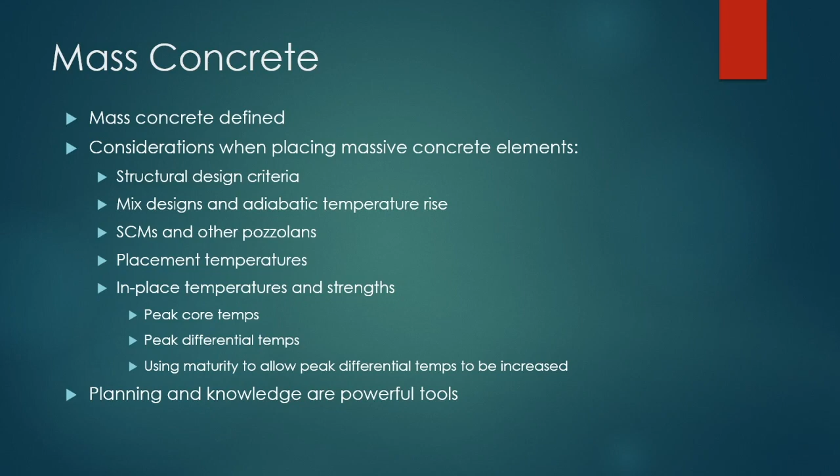So within ACI 207, which is the mass concrete spec, there is a very short, succinct definition, which is: mass concrete is defined as any volume of concrete with dimensions large enough to require that measures be taken to cope with the generation of heat from hydration of the cement and the attendant volume change to minimize cracking. So it really is all about trying to make sure that the massive concrete that you place doesn't crack. That's the goal.

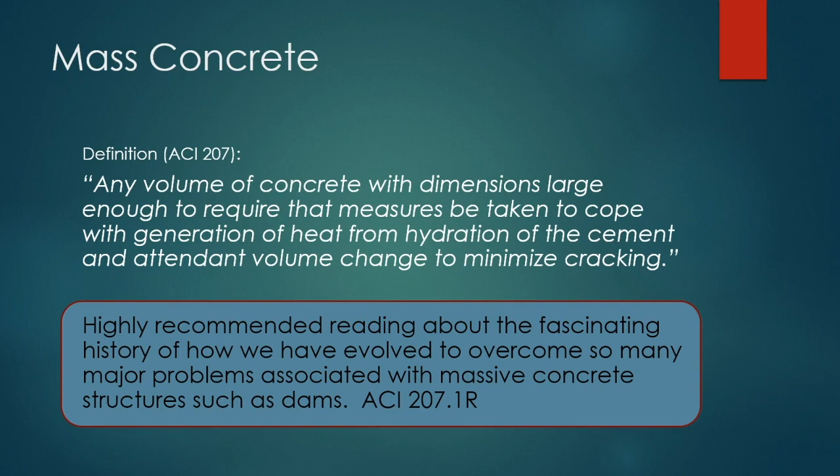I would highly recommend, if anybody is interested in it, to pick up ACI 207.1R, which is the latest version of the mass concrete spec. And it's the intro spec. There are several others, but there's a great section on the history of mass concreting. It was fascinating to read, had no idea, and it's really pretty interesting stuff. So not going to get into it here, but definitely read it if you're into history.

So as far as structural design and the engineering of mass concrete, mass concrete is used when you need certain durability and obviously structural integrity for a bridge, a dam, anything like that. There are definite structural design criteria that have to be met. For example, durability. This mass concrete can't just fall apart in 20 years. You want it to be durable. You want to make sure that when you're building, you do this with economy in mind. Certain aspects of mix designs, for example, or even the economy of placement, the economy of the construction process itself has to be considered.

You have to consider the thermal action of the mix design that you are creating, because you can have a mix design that sounds great in theory, but that might not function well in practice. And ironically, in mass concrete, you would think that strength would be a big deal, and it's not. It's almost always very much a secondary concern. Part of the reason for that is that the strength of the mass concrete is rarely an issue, because it's mostly the mass that is doing the structural function, not necessarily the strength.

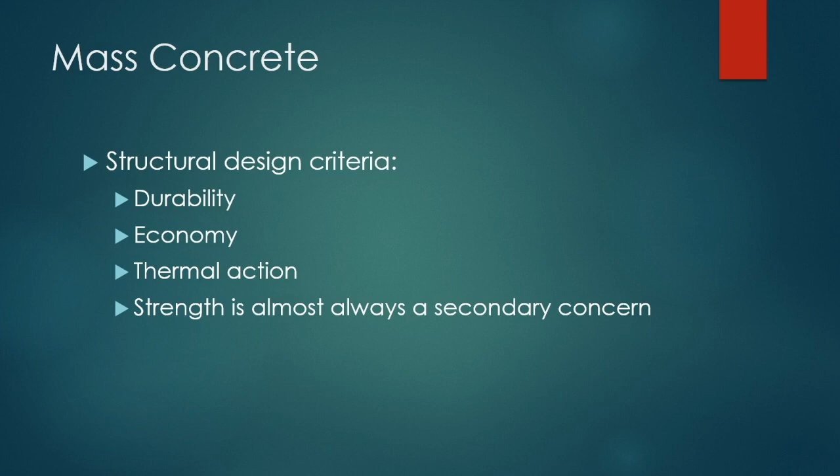So there is so much in ACI 207 that talks about mix design considerations that it would just be a disservice to 207 to talk about it here in a quick little webinar. But they do point out that thermal action and adiabatic behaviors are a very important consideration when you are creating a mix design.

And what that means, if you do not know what adiabatic, or some people have referred to it as semi-adiabatic, these are behaviors where when you create a mix design, that mix is going to behave in a certain way where when you mix the concrete at one temperature, no matter what, that concrete mix is going to rise a fixed amount. It's the adiabatic rise. That is a property of a mix design.

So if you have a mix design that has, let's say, 300 pounds of Portland cement, and you place it in a mass, you know how many degrees that mass is going to rise at its core. That is the adiabatic behavior that you're looking for. We'll talk a little bit about how you can evaluate it a little bit later on.

And then there's workability. You have to be able to have a mix design that's also workable. It has to be pumpable, or maybe not. Maybe you're going to use buckets. How is the concrete going to be placed? There are a lot of other variables addressed in 207, such as the control of the water-cement ratio, the placement temperature, the size of the aggregate, the cleanliness of the aggregate, if you can believe that. Anything that goes into quality concrete is magnified when it comes to mass concrete.

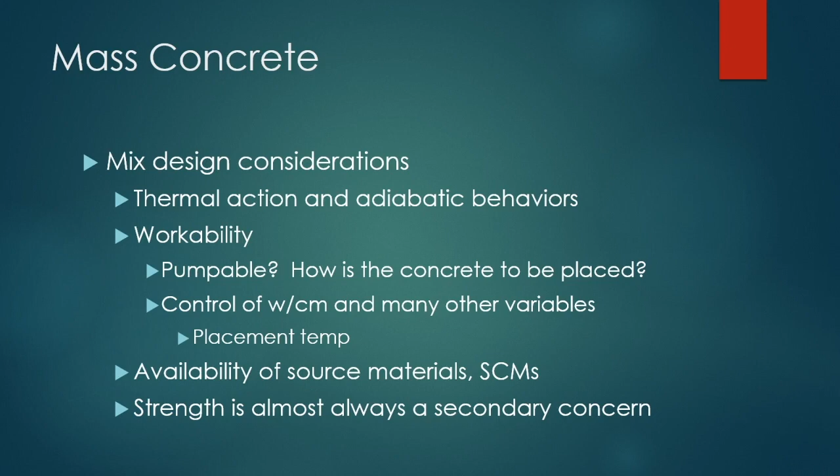And then, as I said earlier, strength is almost always a secondary concern. Pretty much any mix design is going to get to the strength that is needed for that project. So some of the other considerations are, obviously, you need a low heat of hydration cement, for example, like a Type 2. It's pretty rare that people are using a standard Type 1 cement these days, unless you have a very high percentage of slag. And I'll talk about that in a minute.

One of the things that they stress in the 207 document is that mass concrete mix designs typically have very low cement factors to begin with. Some of them are ridiculously low. There was one that they cited in the document with 185 pounds of total cementitious materials per cubic yard, which was unheard of even as recently as 20 years ago. So there have been a lot of advances made in even the past 10 years in understanding the effects of these cementitious materials.

They do talk about in the document that air entrainment can really aid in workability, even in situations where freezing and thawing isn't a big concern. So if you are working with mass concrete and you have no other way to improve the workability of your mix, you can consider adding an air-entraining admixture. There are plenty of admixtures that they cite to reduce the water requirements while also improving workability, and also something called pot life, which is the ability of the concrete to stay fluid inside the mixer, and also delaying set times so that all of the concrete sets up together.

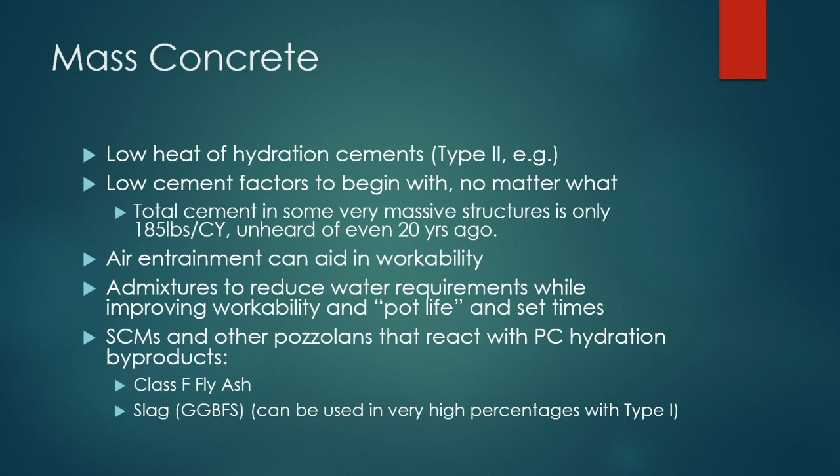One of the big aspects, and to be honest with you, it's a big aspect of not only mass concreting, but of course it's a big aspect for Con-Cure, because that's what we do. We make temperature monitoring equipment, but temperature control of any mass concrete element is very important.

There are multiple ways. They cite 4 different ways to control the temperature of your mass element. The first is with what they call pre-cooling. And pre-cooling simply means you're going to cool the aggregates. You're going to use potentially ice for your mix water. You might use liquid nitrogen to cool the mixed concrete, and you're going to ensure low placement temperatures.

So what that basically means is, instead of, in the dead of summer, placing your standard 90-degree concrete, you're going to intentionally make that concrete something like maybe 50 degrees or 60 degrees, just because you want that low temperature to start off with, because you've got that adiabatic rise to contend with.

And then the other thing that you can do, and I don't know how often it's done these days, I've actually never been on a project where they had to run pipes through the structure, but post cooling is where you'll run pipes through a structure and run either cold water or something else that removes the heat from the inside of the mass.

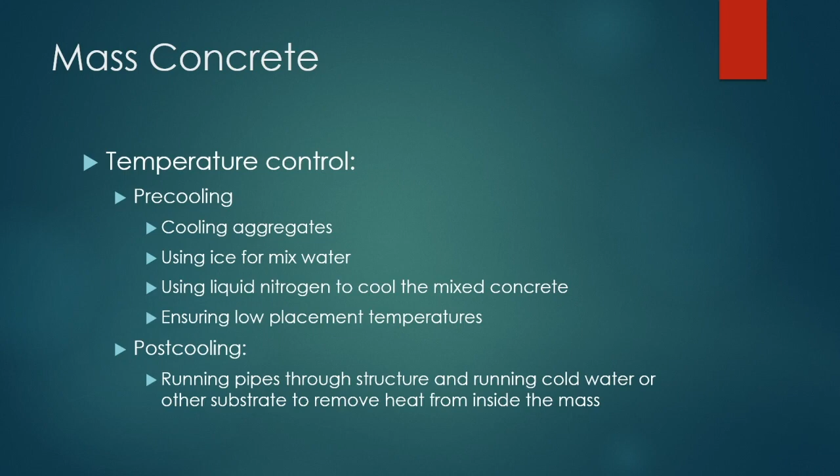That's one way of doing it. Apparently, with very massive structures, that's still common. I've not worked on one that ever needed that. And then we touched on this a few minutes ago, but using the mix designs to keep that heat

If you can't exceed, I'll just throw a number out there, 155 degrees, and your maximum temperature rise for that mix design is 65 degrees, then your maximum placement temperature is 90 degrees. Typically, you're going to want to place concrete at much lower temperatures than that.

And as long as you know that the maximum peak temperature value will not be exceeded during the initial weeks as it's curing, then all you really need to do is keep the differentials from getting too high, because that's another factor for mass concrete, the maximum differentials, which is the difference between the core, the center of that mass, and the outside edge of that mass. And the way you do that is by using insulation.

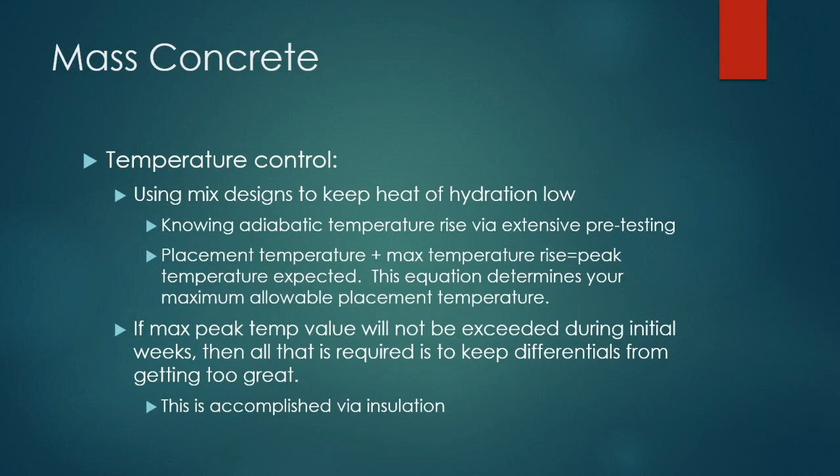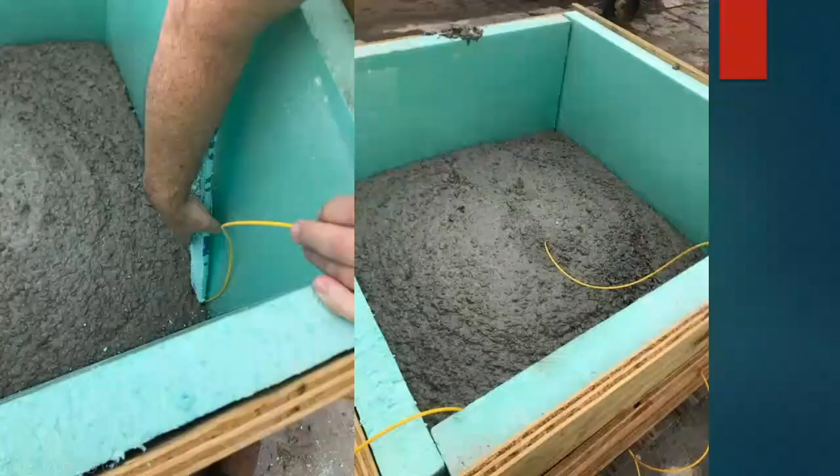If you see right here where my mouse is, there's one of our recording devices, and we've got all these sensors that are ready to go down inside this concrete. And in fact, here's a picture of us putting one of the sensors down along the corner or the edge, and then also one is smack dab in the middle,

and then they filled up the rest of the box just like that. And so we put a lid on it. There's a lid back there. We put the lid on it and we monitor that. And the purpose of this is to determine the maximum heat rise. That's that adiabatic heat rise.

Now this is definitely not adiabatic testing the way it would be done in a laboratory. It just gives us sort of a feel for the concrete that's being generated, the mix design. Because adiabatic testing is a very specific process.

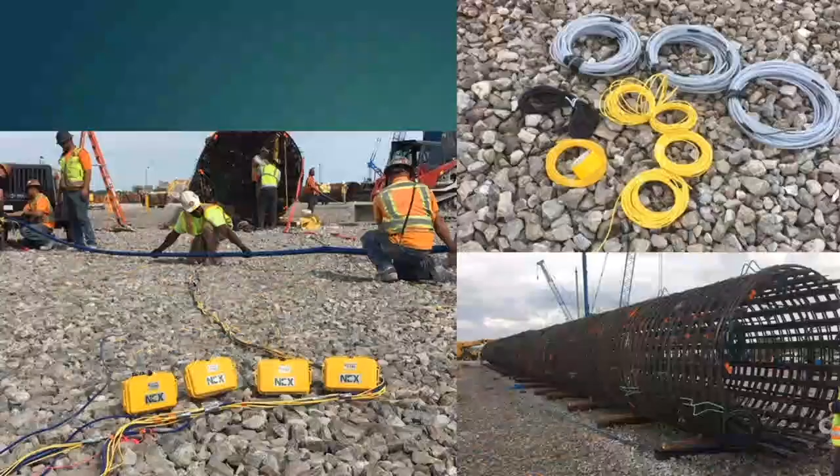And at that point, once we know that the mix design is capable of not blowing past our peak temperature, then we can use it in the field. And these are just some pictures of a large mass concrete job that we're currently on.

We have lots of sensors that are going down inside a very large drilled shaft. The sensors are all strapped up to this giant cage that is then lifted and placed, put inside the hole, and it is a huge project. I think these were 100 and something feet deep.

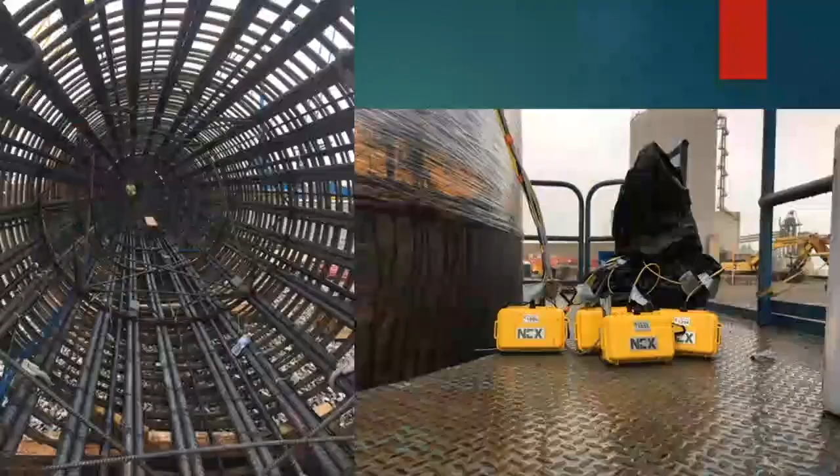We needed to monitor from about the midpoint on up, and so we had sensors that were placed all throughout this cage, and then the sensors actually came up and over this collar here. And if you can see where my mouse is, we've got our devices sitting there recording all of this.

And so when you record all of this temperature, and it may be a little difficult to see, but this is some of the summary data that we were able to collect from that particular test pour that we did, where we had the temperature at a depth of 50 feet, 50 feet of concrete. The centroid, the peak temperature was 142 degrees, well within the maximum temperature that they could experience. So they were well within that. The mix design was working beautifully.

The edge, which is right along the side where the earth is, was only 115 degrees. So the delta, the maximum delta between the centroid and the edge was about 29 degrees, a little bit below that Fahrenheit, which means that again, the mix design is doing exactly what it's supposed to do. You're not going to have too much thermal stresses.

We also were able to, because of maturity, evaluate the strength of this concrete as it's curing, and it took a certain number of hours to reach, for example, 3,500 psi, and then 5,000 psi. And those are important numbers because you don't want to have one area of the concrete that is much higher in strength than another area of the concrete, because that can also cause some stresses.

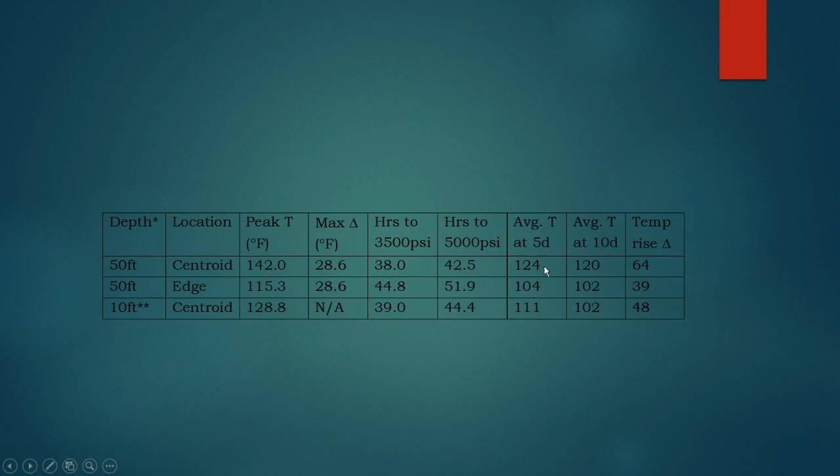And it was pretty interesting that the temperatures, we had a peak of 142 degrees, but then by day 5 it had dropped down to 124. And then by day 10 it had only dropped another 4 degrees. So this concrete was hydrating slowly, and it was doing exactly what it was supposed to be doing.

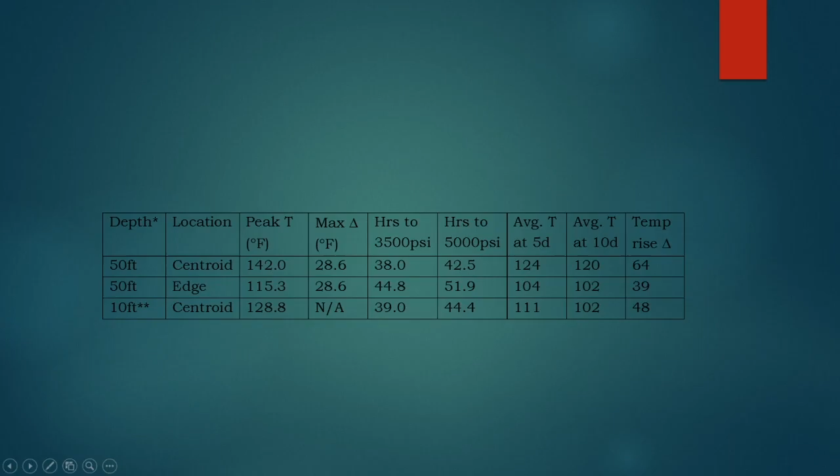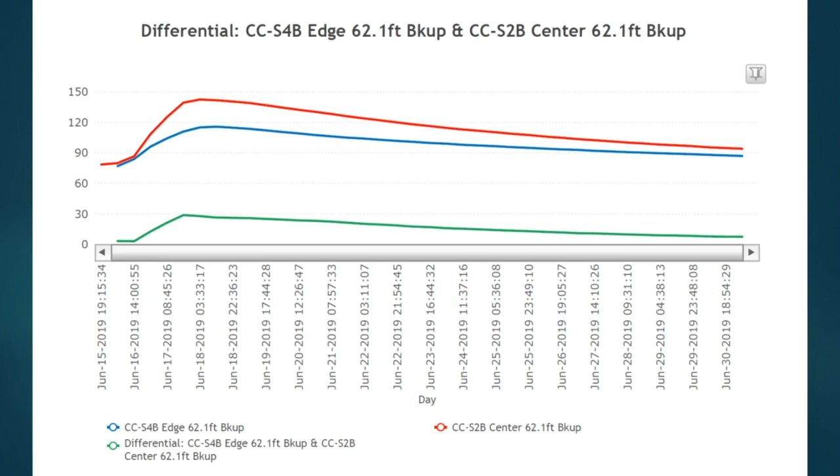So using temperature probes, we can monitor the central core and also the outside edge or the face temperatures, and it gives a clear indication of the status of the concrete at any given moment in time. One of the other things that you can do is use maturity to determine the in-place strength of the mass, which in some cases can allow the maximum differentials to be increased gradually because the concrete can withstand the tensile forces that are acting upon it.

And really, what that basically means is that you have the opportunity to use the maturity system to determine the maximum temperature allowance based on the strength of the concrete. Initially, you may have a limitation of no more than 35 degrees difference between the core and the outside edge of that concrete.

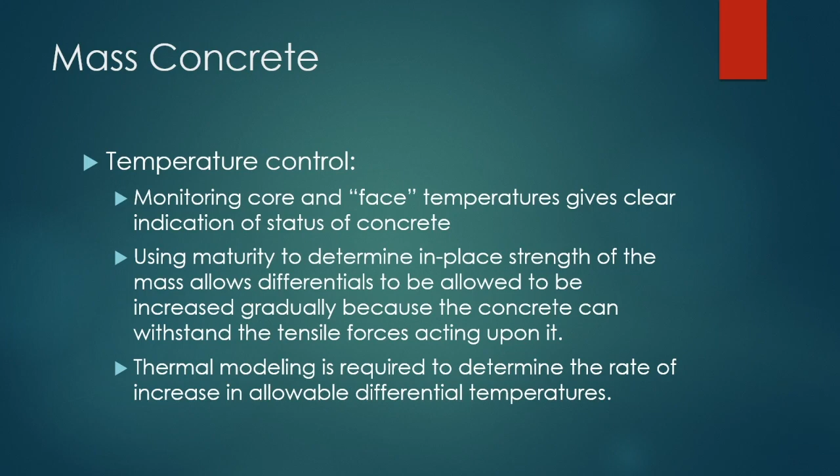This can have a huge impact on construction, on the pace of construction, how quickly you can strip forms, remove blanketing, things like that. I will say, though, that thermal modeling is required to determine the rate of this increase in allowable differential temperature. So it's something you should definitely talk to an engineer about, but we've definitely done this on several projects.

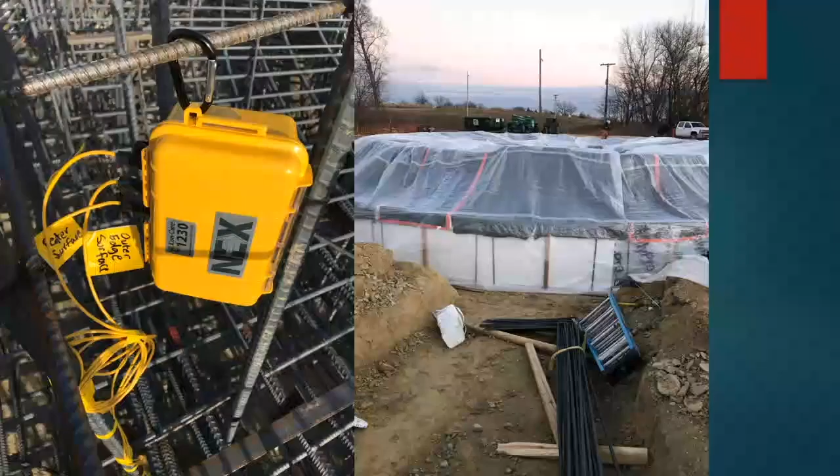Here's another example, a couple other pictures of some mass concrete and customers placing sensors down inside the mass, and they'll place sensors at strategic locations in the core and the outer surface, and then of course they'll make sure that the concrete gets protected, because when they place the concrete, they don't want any of that heat escaping.

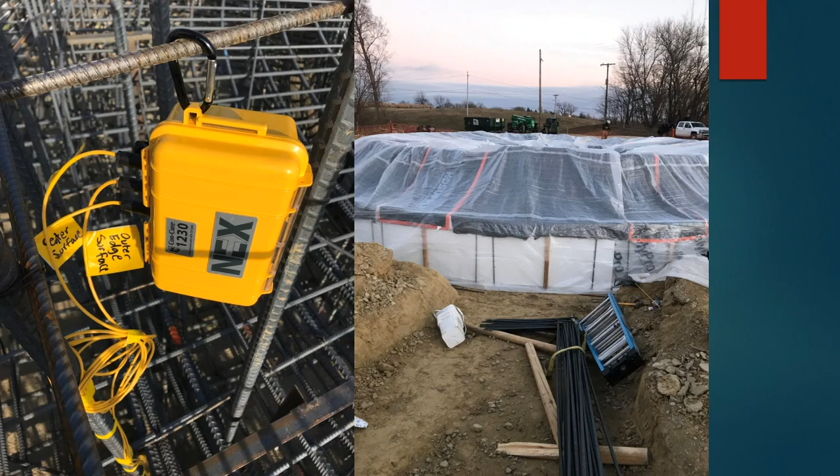I know this was a very cold day when they placed that concrete, so they wanted to make sure that they had heaters. They actually ran heaters inside to keep all the concrete warm, which is counterintuitive when you're talking about trying to keep the heat down. But the mix design was right, and they had plenty of heaters to keep everything warm.

So as far as mass concrete goes, as I said, this is mass concrete light because there is so much to talk about. But what you should know and what you can plan for is you should understand the concrete fresh performance, how it's going to perform thermally, what your peaks are, what your delta is, what your maximum temperature rise is going to be. You need to understand if that mix is going to be workable and pumpable for you.

You need to understand the water requirements because typically for mass concrete, you're going to be working with some relatively low water-cement ratio concretes that may be very difficult to work with. And you should also be aware of your admixture requirements. Knowing all of this, you can actually use admixtures to your great advantage.

The early age properties are really what you want to focus on with sensors, and that's where having sensors in place, monitoring that live data, and monitoring some test cylinders too is great for comparisons. But definitely monitor the live data, because typically for mass concrete you have to monitor the concrete core and the outside edge, and typically you'll also have to do redundant core and outside edge sensors.

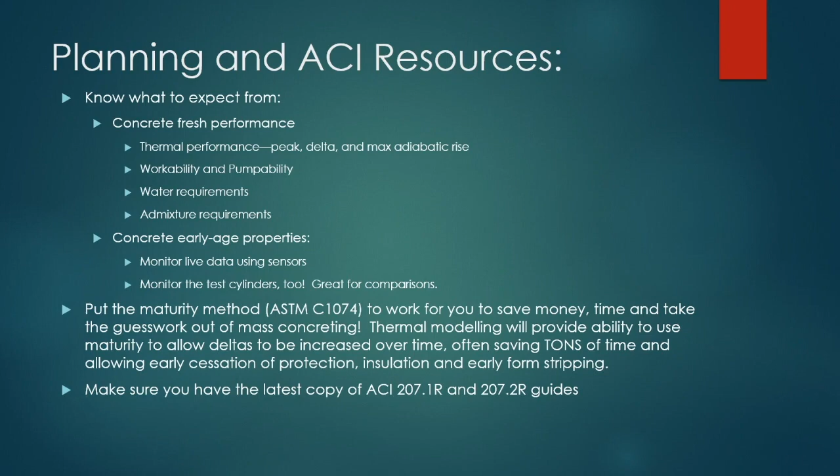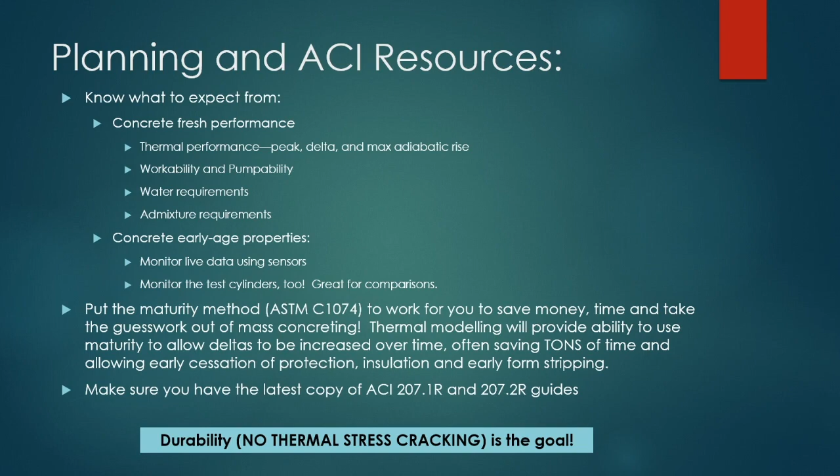And to finish up, I definitely want to make sure that everyone has the latest copies of 207.1 and 207.2. Those two guides are fascinating to read. They will give you a ton of great information about how to properly do mass concreting in the age of a wide variety of cementitious materials. And remember, durability is always the goal. That's what we always strive for, and that means no thermal stress cracking. So if you can do that, then you are winning the mass concrete battle.